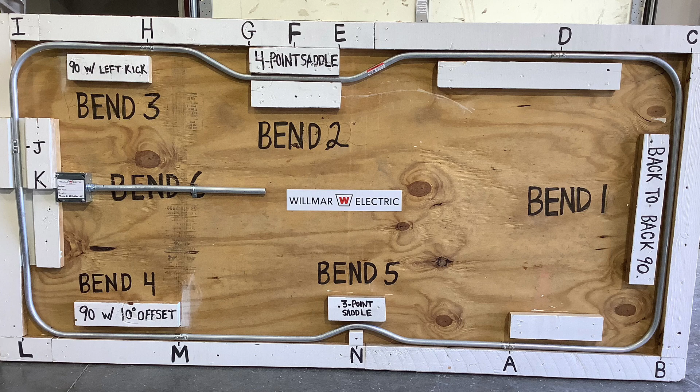Personal protective equipment required to complete the task include a hard hat, safety glasses, and cut-resistant gloves. High visibility vest or shirts and fall protection may also be required depending on the situation. You will need a conduit bender. You will also need a tool pouch or belt that has a pencil, tape measure, level, pipe reamer, and multi-bit screwdriver. If you are using compression couplings and connectors, you will need channel locks.

For training purposes, we will be using an erasable marker to make our marks on the conduit. In the field, you will want to use pencil, especially if the pipe is exposed. In the field, you are not allowed to have more than 360 degrees between pull and junction boxes. Begin at bend 1. It's a back-to-back 90. Begin at point A. Step 1 is determine the bender take-up based on the type and size of the conduit to be bent. A piece of 3/4 inch EMT requires take-up of 6 inches.

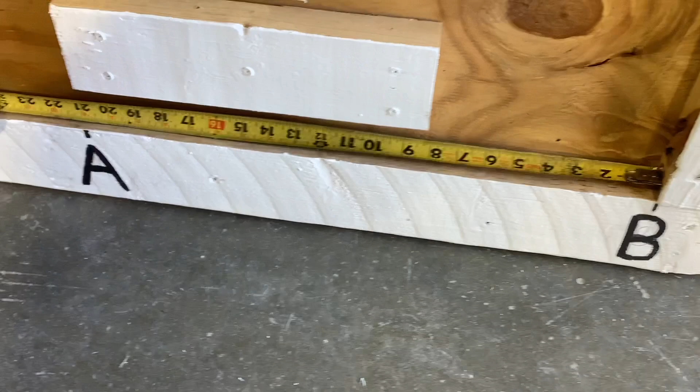Step 2 is determine stub-up height and make the proper mark on the conduit. Measure from point A to point B to determine stub-up height. It is 20 and 3/4 inches long. Subtract the 6 inch take-up from 20 and 3/4 inches. 20 and 3/4 inches minus 6 inches equals 14 and 3/4 inches. Mark the conduit at 14 and 3/4 inches from the end.

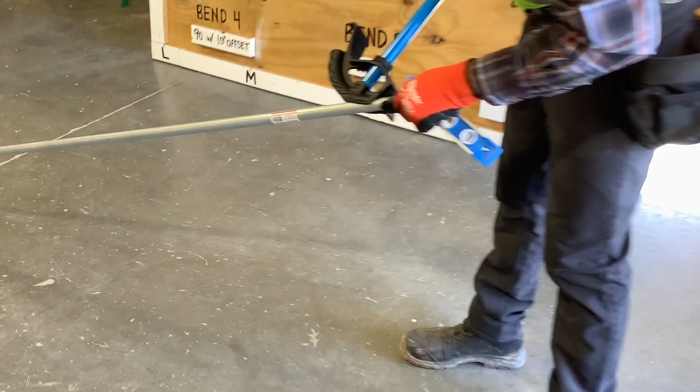Step 3 is make the stub-up bend. Once the stub-up mark has been made, insert the bender onto the conduit and place the conduit securely on the floor. Place the arrow on the conduit bender onto the mark. Place one foot on the conduit and the other foot on the bender foot pedal. Apply equal force with your hands and foot to ensure that the bender does not slip or rise. Continue bending the conduit until the 90-degree marking on the bender is parallel to the conduit.

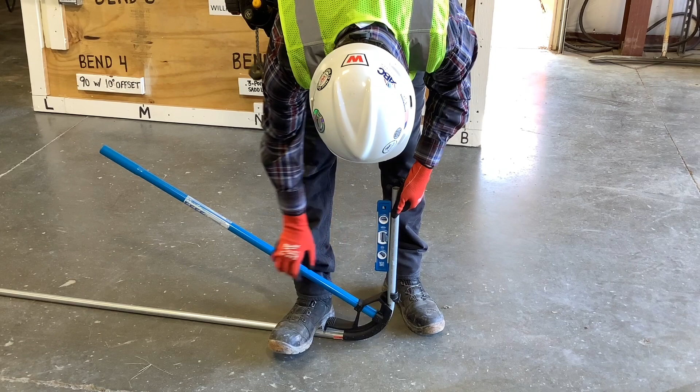Ensure that the conduit remains in contact with the bender for the entire length of the bend. There should be no gap between the bender and the conduit. Use a level to check the degree of bend. If for some reason the conduit is slightly overbent or underbent, take the handle of the bender and slide it over the top of the conduit to add a little or take out a little bit of bend.

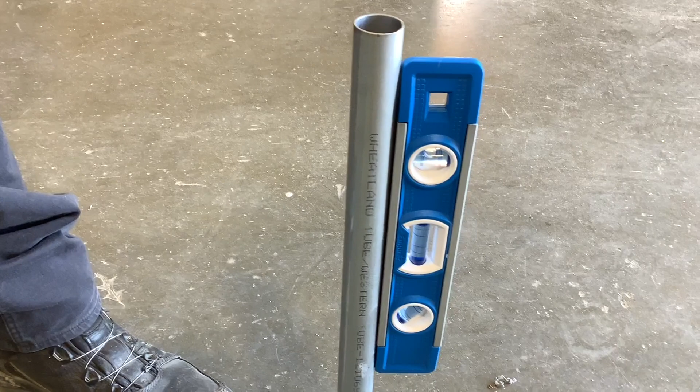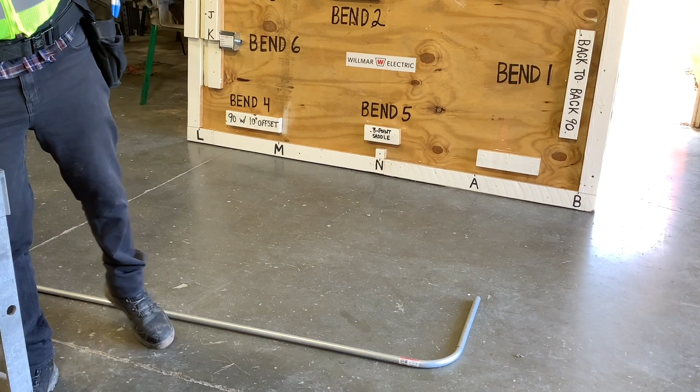After you have completed the bend, position the conduit so that the end is facing up and measure the distance from the floor to the end of the conduit. It should measure approximately 20 and 3/4 inches. Step 4 is to make the back-to-back bend. Measure from point B to point C on the back-to-back 90. It is 41 inches.

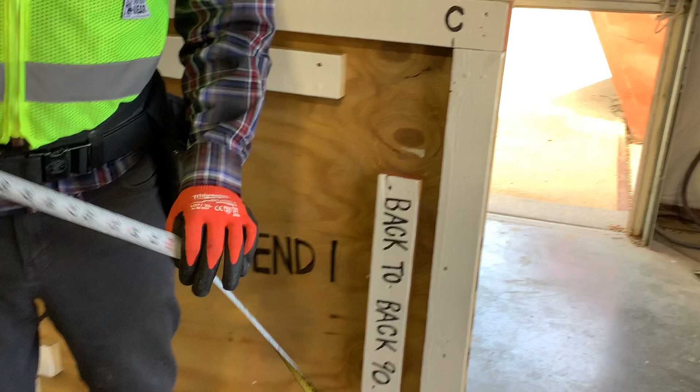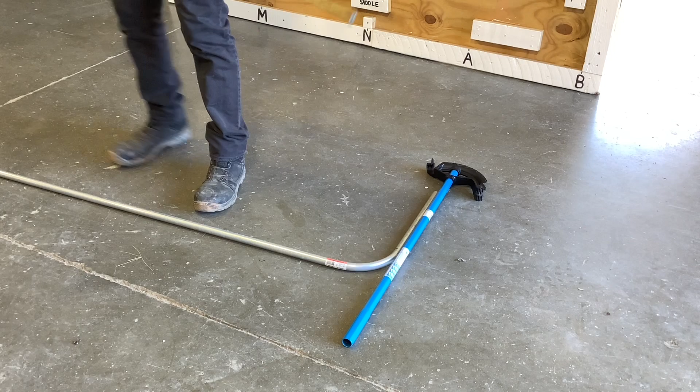To make the second bend, place a straight edge on the back of the first bend so that you can accurately measure from the back of the first bend. This could be a wall or the handle of the conduit bender. Mark the conduit all the way around at 41 inches.

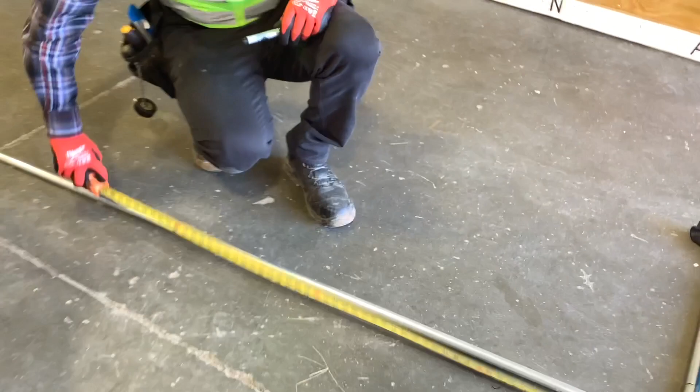When bending the back-to-back 90, make sure to keep the first 90-degree bend straight up and down to prevent having a dogleg. Using the star point, make the second bend back towards the first using equal hand and foot pressure.

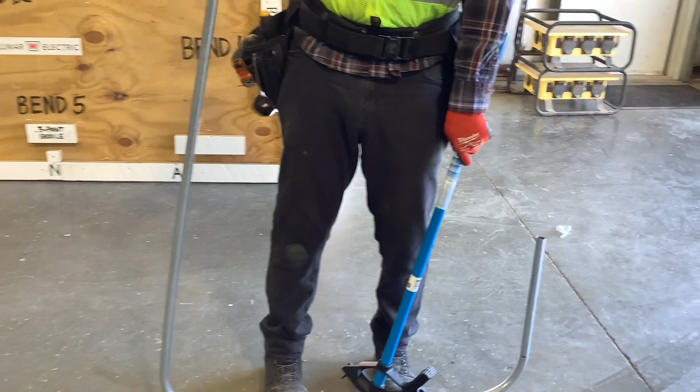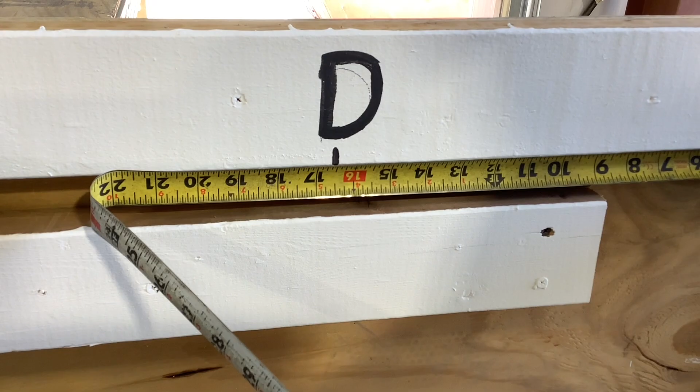Check conduit for a dog leg. If you have a dog leg, take it out. Measure from point C to D. It is 16.5 inches. Mark conduit at 16.5 inches.

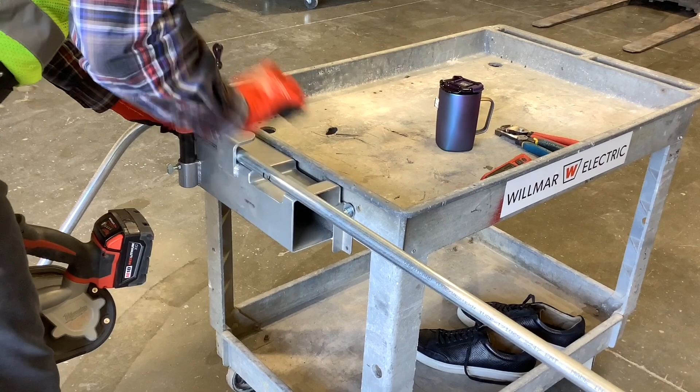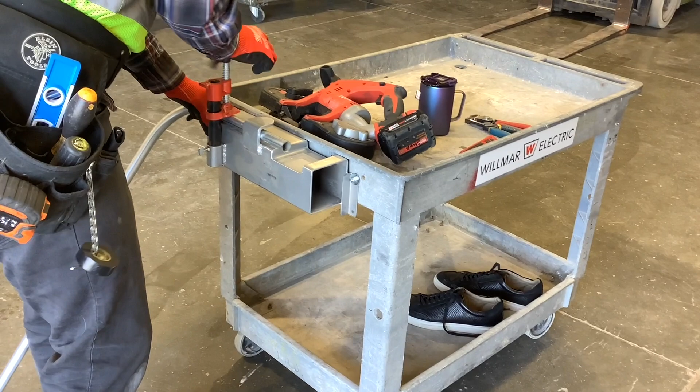Cut and ream conduit at 16.5 inches. Put conduit coupling on pipe.

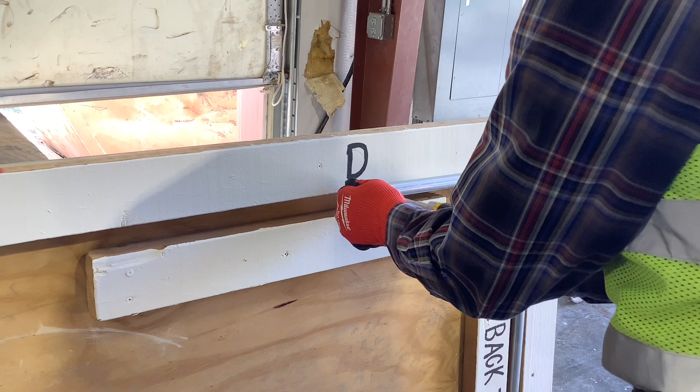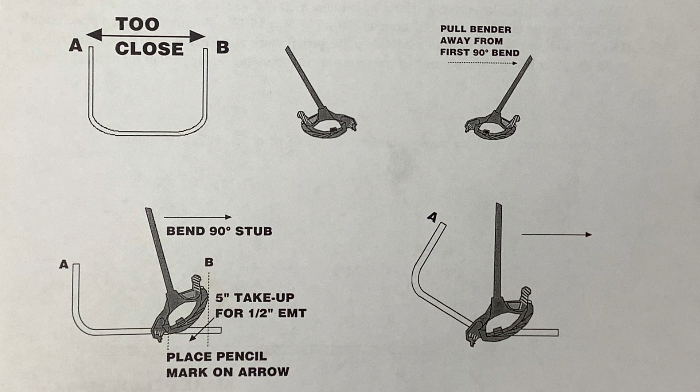Note, if the distance between the back-to-back bends is smaller, you will want to make the second bend in the opposite direction. You can do this by subtracting the 6-inch take-up from the 41 inches and marking the conduit at 35 inches. The bend would then be made by using the arrow on the conduit bender and bending away from the first bend. Bend 5 is a 3-point saddle.

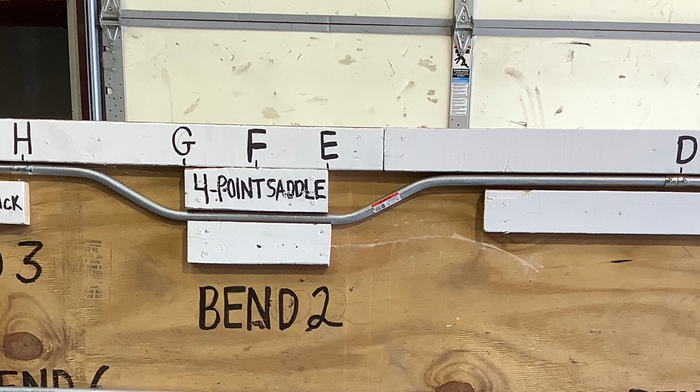4-point saddles are used when a square or rectangular object is encountered on a conduit run. A 4-point saddle is just 2 offset bends that are combined to form one smooth transition over an object. Step 1 is determine the height and width of the object. Measure the height and width of the object or obstruction. Also, measure the distance from point D to the front edge of the object at point E.

The object is 3.5 inches high and 12 inches wide. The object is 28 inches from point D. Step 2 is determine the angles and perform the calculations.

4-point saddles are made in the same way as offset bends, except that 2 offsets are needed to complete the bend. Although you can use a variety of angles, be aware that 30-degree bends tend to work best. We will use 30-degree bends for the 4-point saddle. Calculate shrink using the offset formula chart or the offset bending guide sticker on the Ideal bender handle.

When 30-degree angles are used, shrink per inch is 1/4 inch. The shrink would be 3.5 inches times 1/4 inch equals 7/8 inches. 30-degree offsets have a multiplier of 2. The distance between the bends would be 3.5 inches times 2 equals 7 inches.

Step 3 is mark the conduit. The conduit will have 4 marks. These marks start closest to point D. Because the object is 28 inches from point D, make the first mark at 28 inches plus 7/8 inches for shrink equals 28 7/8 inches. This mark represents where the first offset will finish.

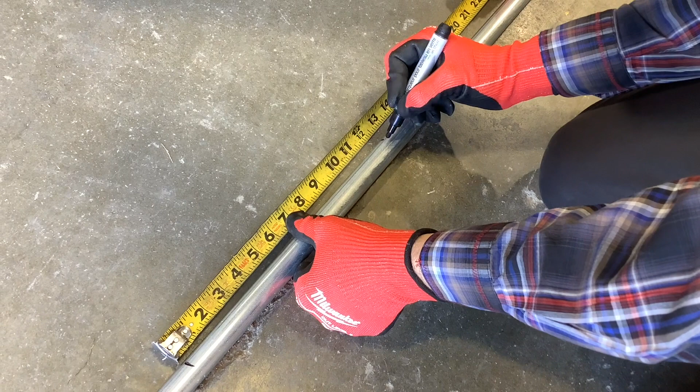The second mark should be 7 inches from the first mark. The third mark is determined by the width of the object, which is 12 inches. The third mark should be 12 inches from the second mark. The fourth mark should be the same as the distance between the first mark and the second mark, which is 7 inches.

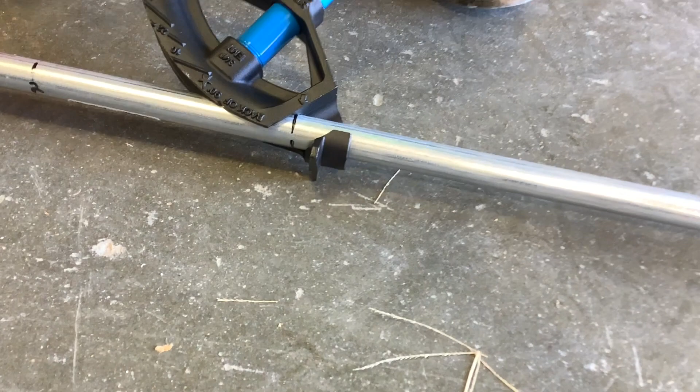Step 4 is make the first bend. When making the bends for a 4-point saddle, make sure that the conduit bender foot pedal is facing away from the center of the 4-point saddle. The first bend is made at the first mark. Place the arrow on the conduit bender on the mark and make a 30-degree bend. Make this first bend on the floor.

You can look at the bender head to see if you are at 30 degrees. Otherwise, if you are using the correct bender, you can put a level on the handle. If the bender handle is straight up and down, you know that you have a 30-degree bend.

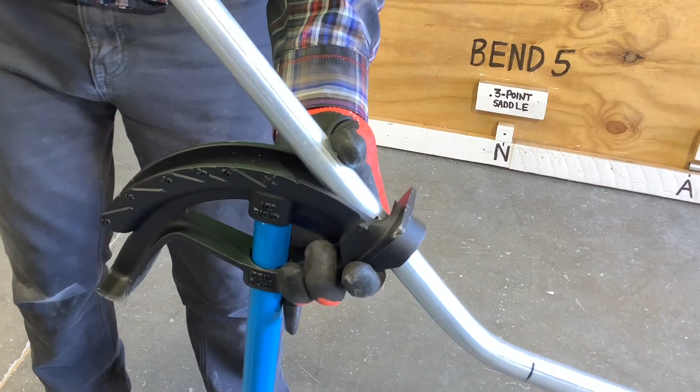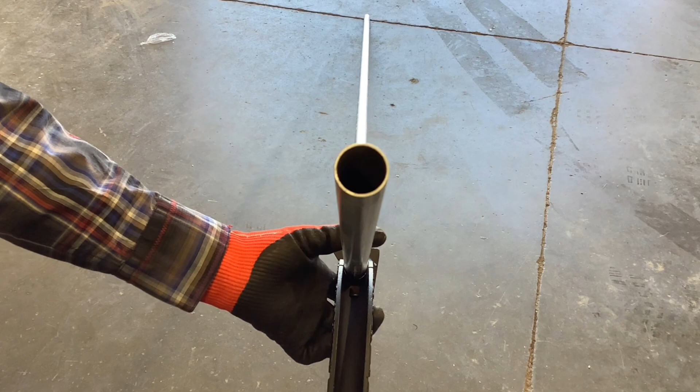Step 5 is make the second bend. The second bend is made by picking up the conduit and the bender and turning them upside down with the bender handle placed on the floor. Slide the conduit to the second mark and rotate the conduit 180 degrees. Look down the conduit and line up to ensure that you will not create a dogleg. Use the arrow on the conduit bender for this bend. Place the conduit under your arm and bend it to 30 degrees.

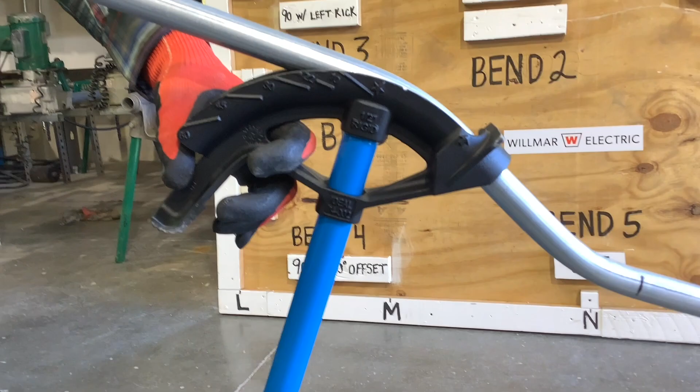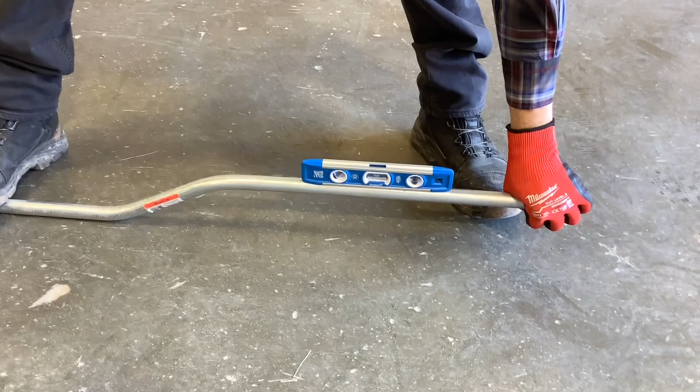You can check to make sure that both bends are bent to the same degree by putting a level on the offset. Check to see if you have a dogleg. If you have a dogleg, remove it.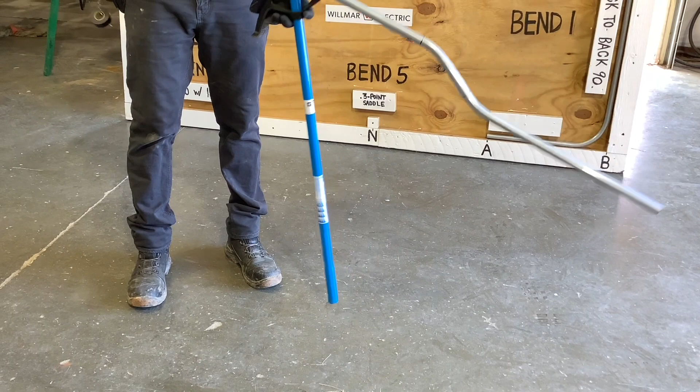Step 6 is make the third bend. Remove the conduit from the bender. Turn the conduit around so that the first two bends are now pointing away from you. Put the conduit back into the bender and slide it to the third mark. Look down the conduit and line up to ensure that you will not create a dogleg. Apply pressure close to the conduit bender to ensure the conduit is bent at the conduit bender and not further down the conduit. Using the arrow on the conduit bender, place the conduit under your arm and bend to 30 degrees.

Step 7 is make the fourth bend. Leave the conduit in the bender. Slide it to the fourth mark. Rotate the conduit 180 degrees and align the conduit with the other bends to ensure a straight bend. Look down the conduit and line up to ensure that you will not create a dogleg. Place the conduit under your arm and bend it to 30 degrees.

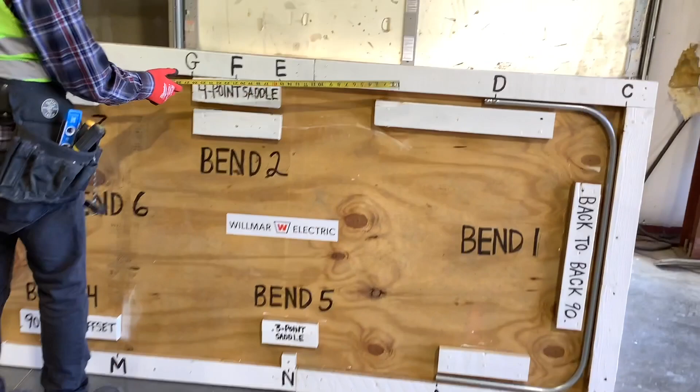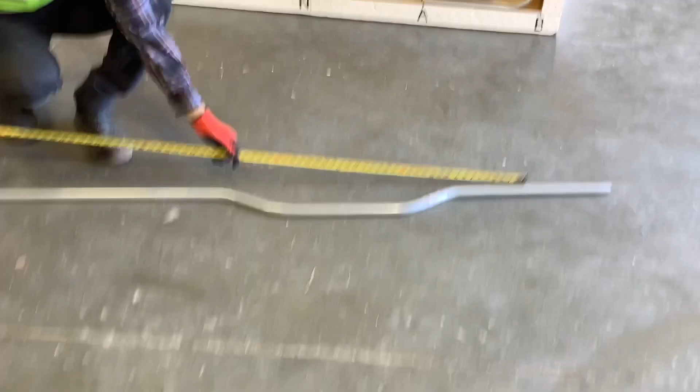Measure from point D to point H. It is 54 inches. Mark conduit at 54 inches. Cut and ream conduit. Place conduit on conduit board and put conduit coupling on.

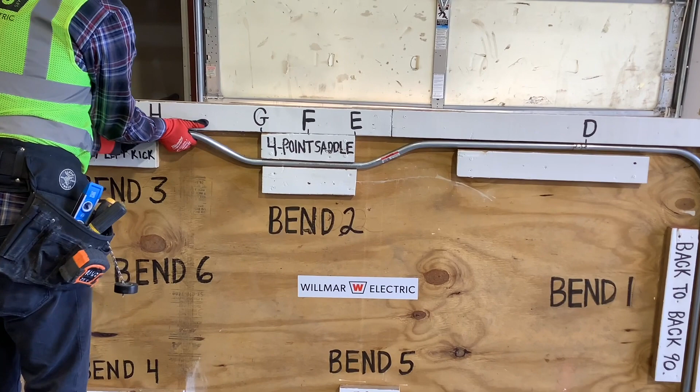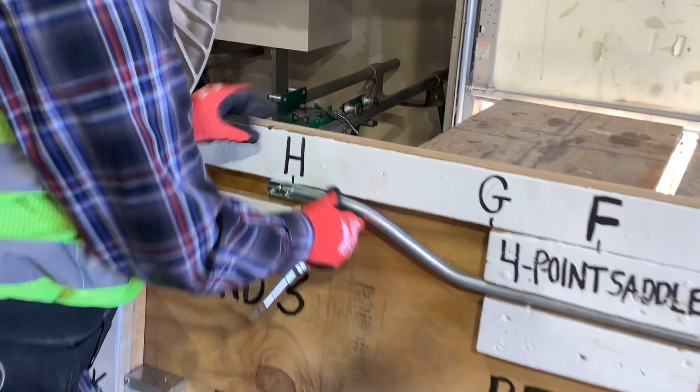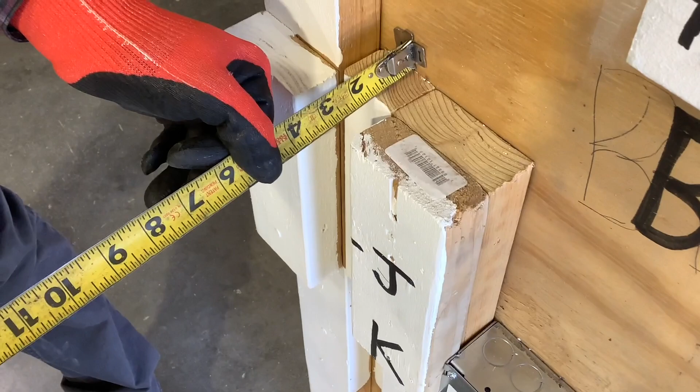Bend 3 is a 90-degree bend with a left kick. Use the smallest piece of conduit left over from previous bends. Bend the 90 first and then add left kick. Step 1 is determine stub-up height and kick height. Measure from point I to point J to determine stub-up height. It is 14 inches. Measure kick height. It is 1.5 inches. Measure from point I to point H. It is 18 inches.

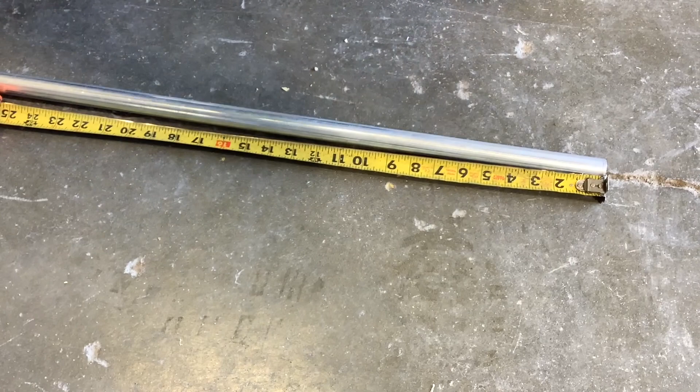The stub-up height is 14 inches. Subtract the 6-inch take-up from 14 inches. 14 inches minus 6 inches is 8 inches. Mark the conduit at 8 inches from the end. Step 2 is make the stub-up bend.

Once the stub-up mark has been made, insert the bender onto the conduit and place the conduit securely on the floor. Place the arrow on the conduit bender onto the mark. Place one foot on the conduit and the other foot onto the bender foot pedal. Apply equal force with your hands and foot to ensure that the bender does not slip or rise.

Continue bending the conduit until the 90-degree marking on the bender is parallel to the conduit. Ensure that the conduit remains in contact with the bender for the entire length of the bend. There should be no gap between the bender and the conduit. Use a level to check the degree of bend.

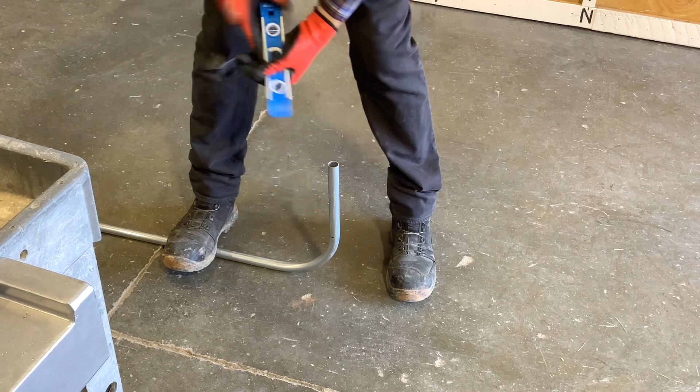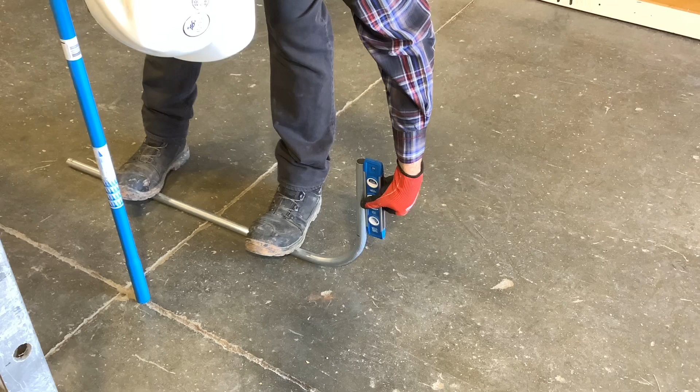If for some reason the conduit is slightly overbent or underbent, take the handle of the bender and slide it over the top of the conduit to add a little or take out a little bit of bend. After you've completed the bend, position the conduit so that the end is facing up and measure the distance from the floor to the end of the conduit. It should measure approximately 14 inches.

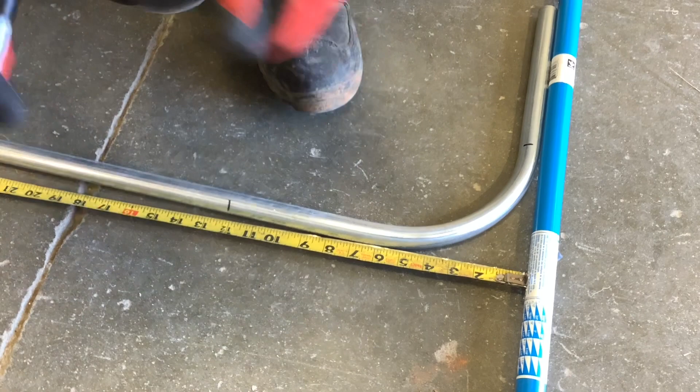Step 3 is measure and bend the left kick to 1.5 inches. From the back of the 90, measure 12 inches and make a mark to bend the left kick. Use a piece of conduit or your bender as a flat surface to measure the distance from the back of the 90. Mark the conduit.

As a general rule of thumb, go back at least 2 times the height of your kick. The further back you go to start your kick, the smaller the degree of bend needed to achieve the kick height. The smaller the degree of bend, the easier it will be to pull wire.

Step 4 is bend the left kick. Put the arrow on the conduit bender on the mark. Make sure that the left kick is level. Bend left kick to 1.5 inches.

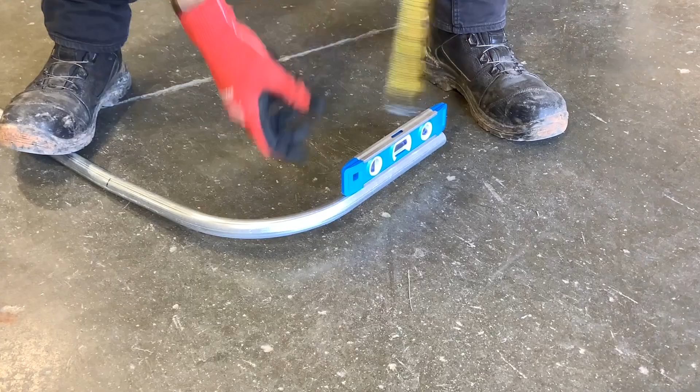If overbent, take some out. To take some out, flip the conduit over and step on it. Point H to point I is 18 inches. Place conduit against conduit board or wall and measure 18 inches from the back of the 90.

Cut conduit on mark. Ream conduit. Place conduit into conduit board. Bend 4 is a 90 with a 10-degree offset. Step 1 is make marks for offset bend.

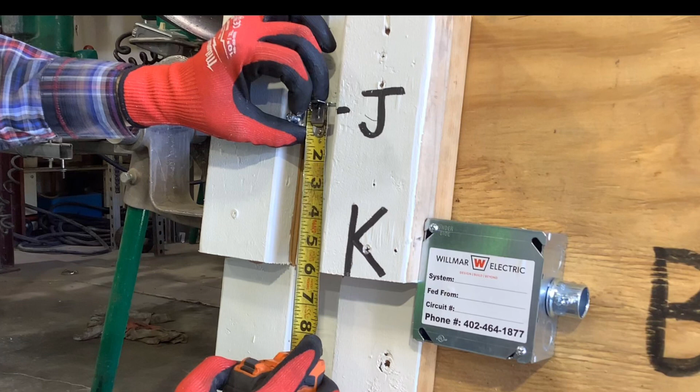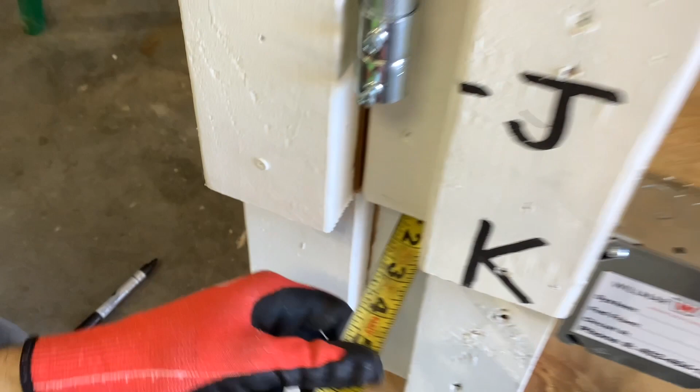Measure from point J to point K. It is 6 inches. Measure the height of the offset. It is 1.5 inches. Measure from point J to point L. It is 27 inches. We're using 10-degree bends because if you use 30-degree bends, the distance between the marks would be too close together and you wouldn't be able to get the bends in that tight. One bend would run into the other.

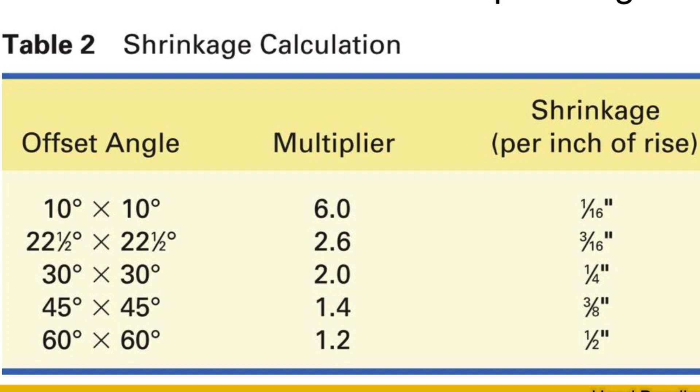Using the leftover piece of conduit, make a mark at 6 inches. We know that we have a 1.5 inch offset. We will take 1.5 inches times 6, since 6 is the multiplier for 10-degree offset bends. 1.5 inches times 6 equals 9 inches. Make another mark 9 inches from the first mark. Trace the mark all the way around the conduit.

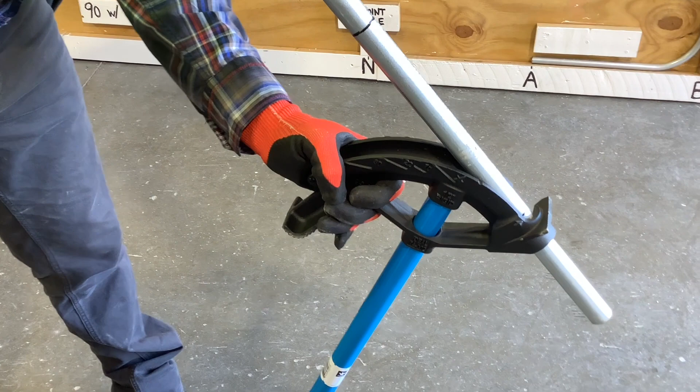Step 2 is bend the offset. Put the arrow of the conduit bender on the first mark. Bend to 10 degrees. Look at the bender head to ensure that it is 10 degrees. Flip the conduit over and go to the next mark. Put the arrow of the bender on the mark. Look down the conduit and line up to ensure that you will not create a dogleg.

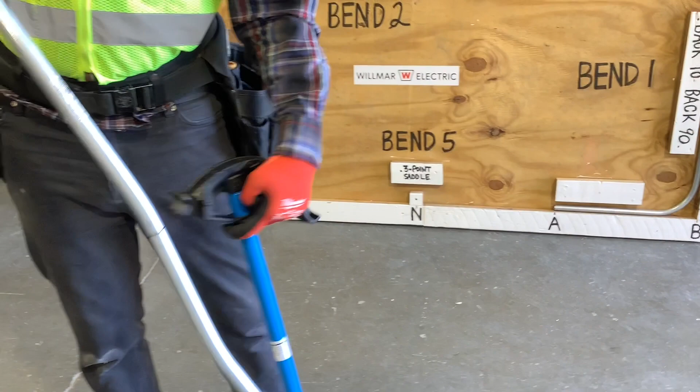Apply pressure close to the conduit bender to ensure that the conduit is bent at the conduit bender and not further down the conduit. Bend to 10 degrees. Check for dogleg. If you do have a dogleg, remove it.

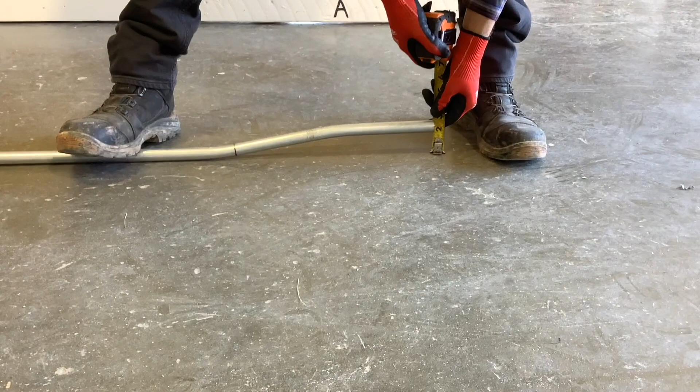Use level to see if offset bends are equal. Adjust if it is overbent or underbent. Look down the conduit to determine if you need to add or subtract from your first or second bend. Measure to see if the offset is at the correct height.

Step 3 is mark and make 90-degree bend. Point J to point L is 27 inches. Lay the conduit against a surface and measure 27 inches back from the end of the conduit. Make mark all the way around the conduit.

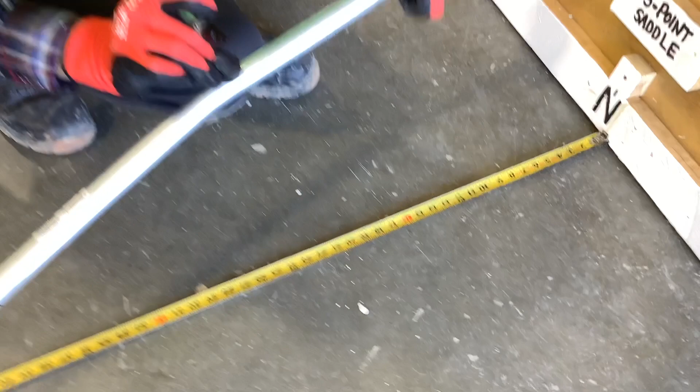Determine which direction the 90 needs to be bent. Use the star on the conduit bender for the bend over to point M. Line up star on mark. Put offset on the ground and bend conduit using equal hand and foot pressure.

Use a level to ensure the bend is 90 degrees. Make adjustments using conduit bender handle if necessary.

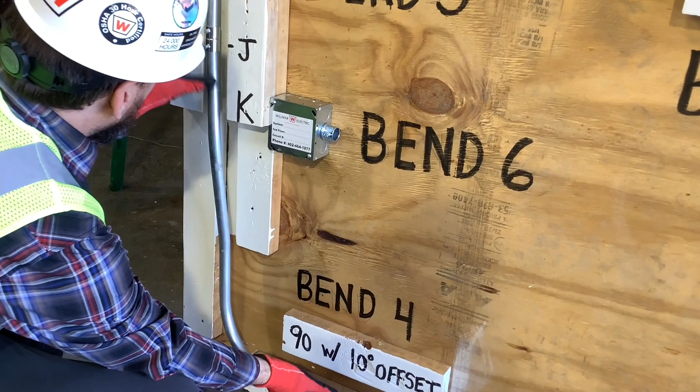Place conduit on conduit board. Mark at point M. You could also measure from point L to point M and mark conduit at correct length. Cut conduit on mark. Ream conduit. Place conduit onto conduit board and put conduit couplings on.

Bend 5 is a 3-point saddle. 3-point saddles are useful when you need to clear a water pipe, vent pipe, or any other round object that may be in the path of the conduit run. They are normally used on objects that are less than 7 inches in size. Although 3-point saddles can be made with 30-degree and 60-degree bends, the best angles to use are typically 45 degrees and 22.5 degrees. Step 1 is determine the distance to the object and the height.

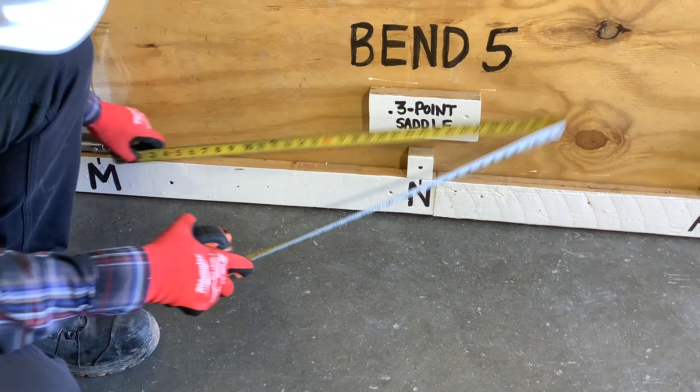Determine how far the center of the object at point N is from point M. Next, determine the height of the object. These measurements will provide the necessary information for making a proper bend. Measure from point M to the center of the obstacle at point N. It is 25 inches. Measure the height of the obstacle. It is 2 inches. Measure from point M to point A. It is 46 inches.

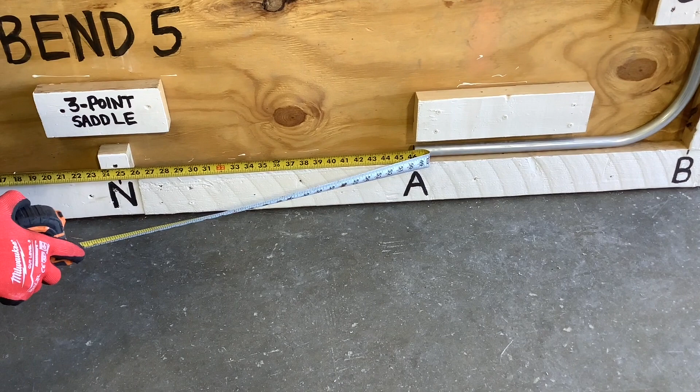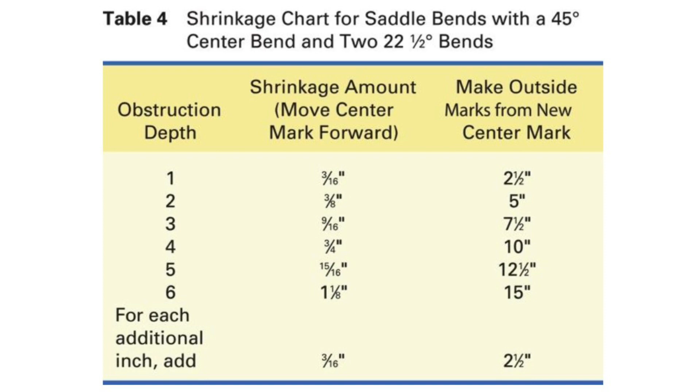Step 2 is determine the angles and perform the calculations. The 45 degree, 22.5 degree combination provides a smoother appearance and is easier to pull wire through. We will use the 45 degree, 22.5 degree combination. We can see that the shrink for 22.5 degree and 45 degree bends is 3/16 of an inch for every 1 inch of the object's height. Using the 3-point saddle bend chart, we can see that a 2-inch obstacle has 3/8 inch shrinkage.

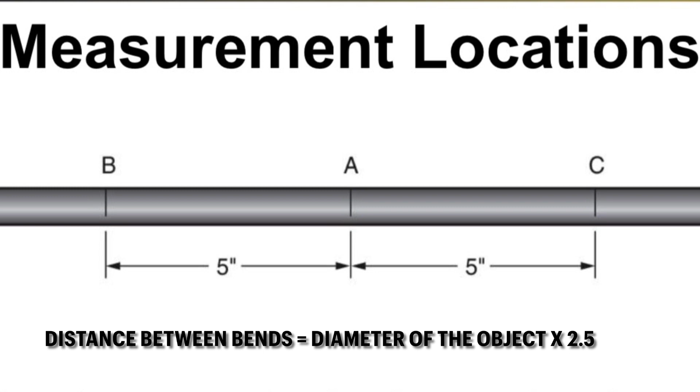To determine the distance between the bends, use the formula distance between bends equals diameter of the object times 2.5. The object is 2 inches high, so the distance between the bends will be 2 inches times 2.5 equals 5 inches. Step 3 is mark the conduit.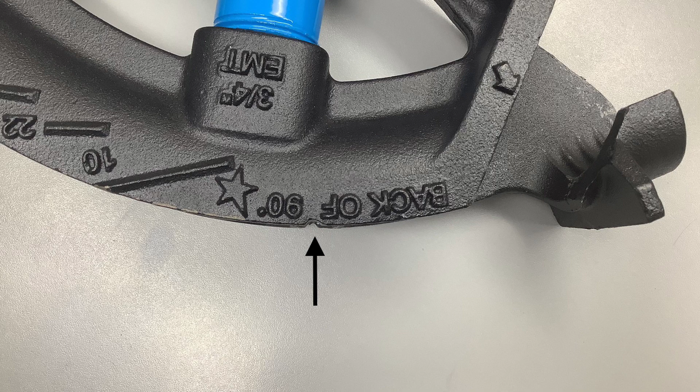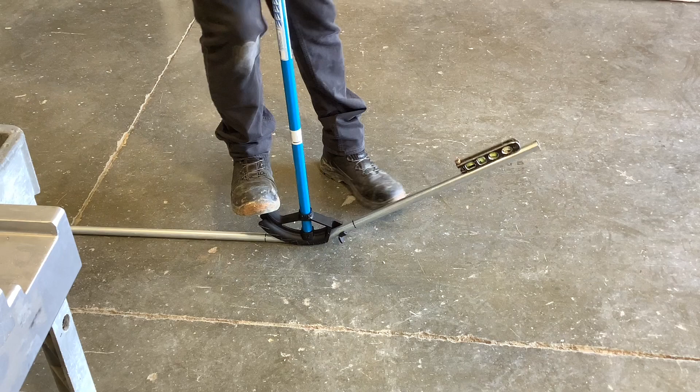Step 4 is make the first bend. The first bend is made on the center mark using the teardrop or rim notch of the bender. The teardrop or rim notch indicates the center of the 45-degree bend. The teardrop or rim notch is located between the arrow and the star on the bender. Place the conduit into the bender with the center mark aligned with the teardrop or rim notch.

Bend the conduit to 45 degrees on the floor. Look to see if you are at 45 degrees on your bender, or use a level to see if you are at 45 degrees.

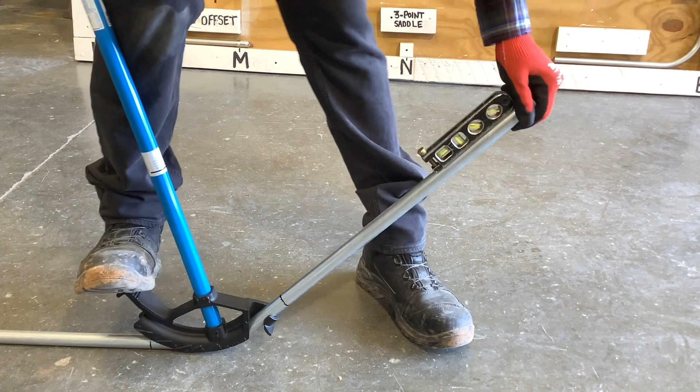Step 5 is make the second and third bends. The second and third bends are 22.5 degree bends. They will be made using the arrow on the conduit bender. The bender handle should be on the floor. Slide the conduit to an outside mark and rotate the conduit 180 degrees.

Place the end of the conduit under your armpit and bend it down to 22.5 degrees, making sure to bend close to the conduit bender. Make sure that the conduit remains straight when you are making the second and third bends. Make the third bend by removing the conduit from the bender. Place the last mark on the conduit bender arrow. Line up the conduit to prevent a dog leg. Make a 22.5 degree bend.

Remove the conduit from the bender and check to see if the 3-point saddle looks good. Look down the conduit to see if you need to add or remove bend from either of your outside bends. Add or remove from bends if necessary. Look down the conduit to see if you have any dog legs.

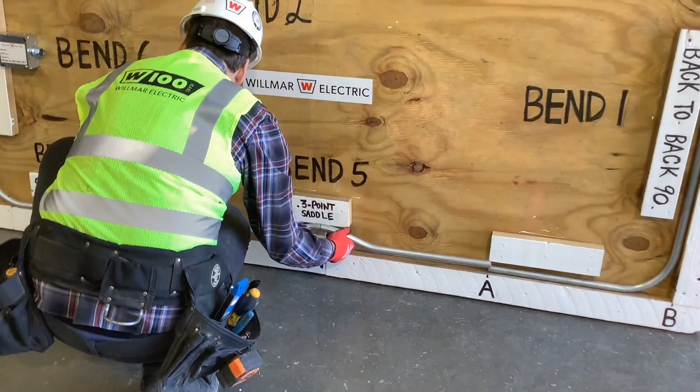Point M to point A is 46 inches. Mark conduit at 46 inches. Cut conduit on mark. Ream conduit. Place conduit onto conduit board and put conduit couplings on.

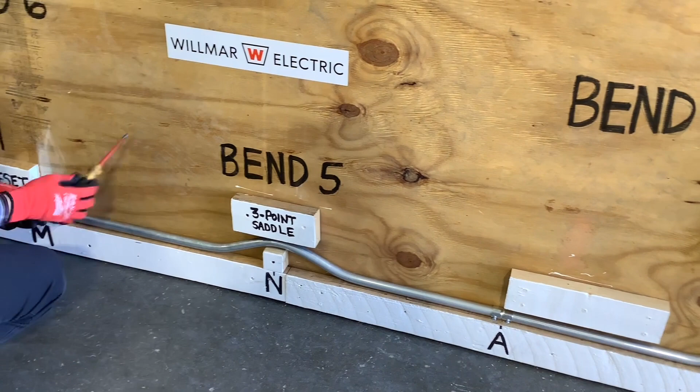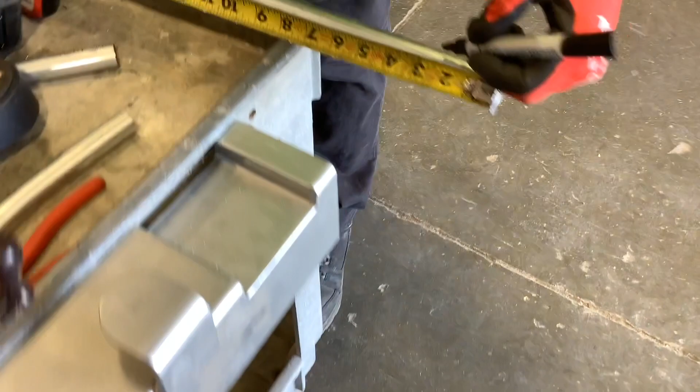Bend 6 is a box offset. Oftentimes, these small offsets are made without any measuring or calculations. The quickest way to make a 1 inch or less offset is to make the first bend approximately 2 inches from the end of the conduit that enters the box. Make this first bend using a 10-degree angle.

Slide the conduit forward approximately 1 to 2 inches. Rotate the conduit 180 degrees and make the second bend using a 10-degree angle. Place conduit onto conduit board.